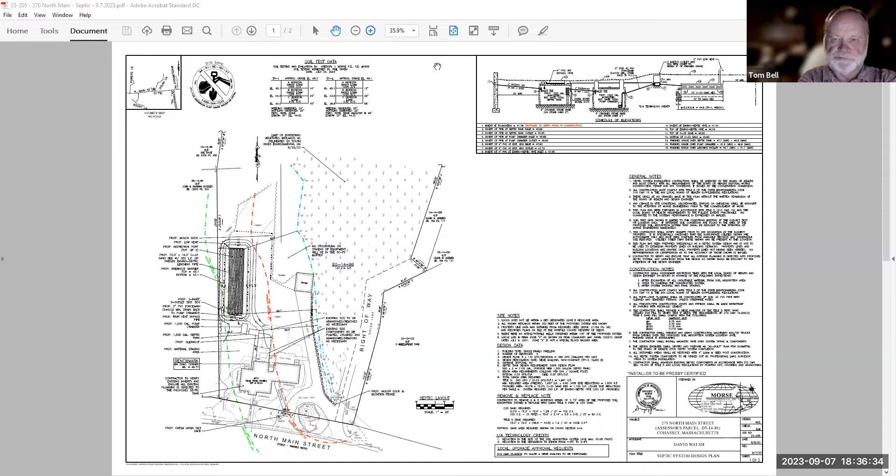So yeah, again, everyone, for the record, James Garfield with Morse Engineering, here representing David Walsh for the RDA associated with this septic system upgrade. Let's see here. Can everybody see this? Yes. Okay. All right, so to familiarize yourself with this plan, we've got our property lines shown here in bold, North Main Street shown down at the bottom of the page. This is an existing 5-bedroom single-family dwelling with a failing Title V septic system. The existing septic system partially resides within the 50-foot buffer to a bordering vegetated wetland.

And what we're proposing is to upgrade the septic system with a new 1,500-gallon septic tank, 1,500-gallon pump chamber, which will then pump the effluent up to a Presby EnviroSeptic leaching field. Just given the dimensional constraints at this site, it's impossible to keep the septic system outside of the 100-foot BVW setback. So we are keeping all septic components outside of the 50-foot setback. We are proposing a mulch sock down gradient of the proposed work. And we also, per Charlotte's request, are proposing a mulch sock with a silt fence along the existing driveway, which directly abuts the bordering vegetated wetland shown in blue.

It should be noted that Board of Health has approved this plan, and we believe this is a great improvement from what currently exists at this site. So with that, I'll pass it back to the commission for any questions. Commissioners, do you have anything to add to this? Questions? Is there any vegetation being removed for this system?

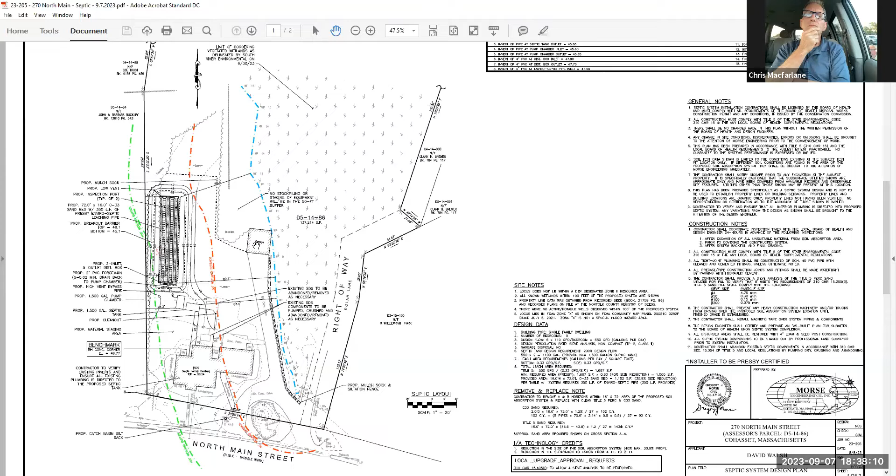I'm sorry, come again with that? Is there any vegetation or any trees being removed for this system? Yes, so one 4-inch caliper tree is being proposed to be removed, and then some brush, some underbrush as well. Mr. Garfield, can you use your pointer to show the tree that's being removed? Certainly. So it's shown here in red right there. Oh, okay. Thank you.

Where was the previous drain field or septic? So the existing septic system is shown here. Here's the existing septic tank, which then flows into this rectangular leaching field. So considerably smaller in size, and lower into the groundwater table as well. Can you show us the soil test? It looks like you've done 2 soil tests there. Yep. Can you show us the details of that, please? Yep, so right here, we've got groundwater down 20 inches in test pit 1 and 22 inches in test pit 2. So we're bringing the system up.

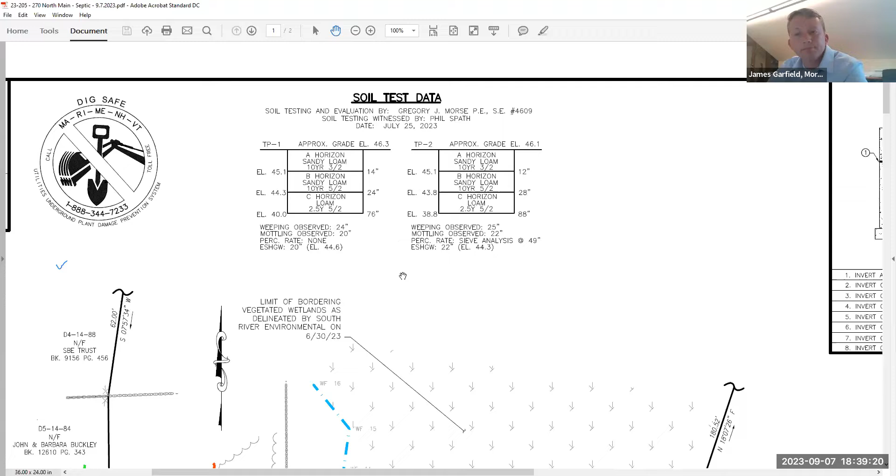How are you gonna access the site? So the site's going to be accessed through the existing paved driveway, which is why we've added this erosion control barrier along it. There's really not enough width to get machines through the left side of the house here. It's possible, but we'd have to take even more brush and landscaping out than we are currently proposing. Traffic's already going through this existing paved driveway, and it's maintained lawn to the left of that. So we're gonna be working on the upland side, obviously, of that driveway to access that leaching field.

So you go up the driveway until you have to cross over to access, so presumably there'll be some disturbance off the driveway in the 50-foot buffer zone. We are proposing no soil stockpiling or staging of equipment within the 50-foot buffer, and we have a note to that effect right here. But they will have to cross the lawn to get over to the construction area. Mhm.

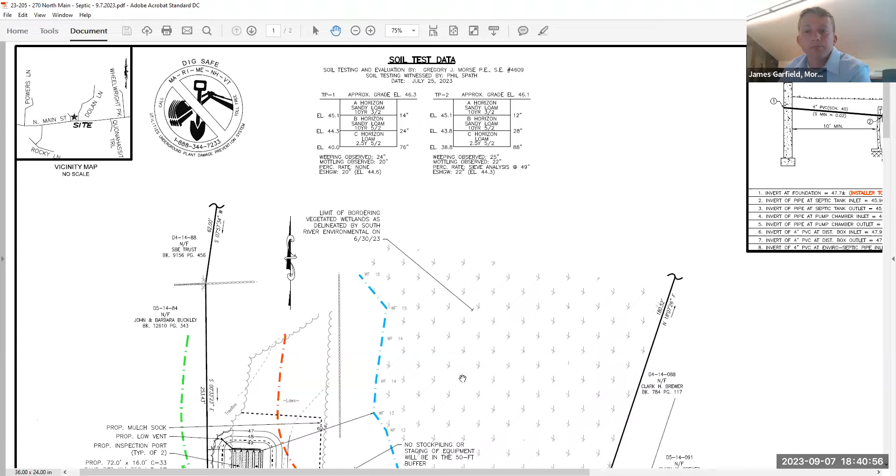Were you required to do a percolation test on this drain field or at that site? Yes, so we did a perc test as part of this filing with the Board of Health. So we did a sieve analysis in lieu of a perc test within test pit 2. Okay. Any other questions from the commission? No. Questions or concerns, comments?

Okay, with that, I would invite anybody who would like to make a motion to approve this. Actually, this is an RDA. So it would be a motion for either a -2 or -3, -3 if we have any conditions. Yeah, I have one other question.

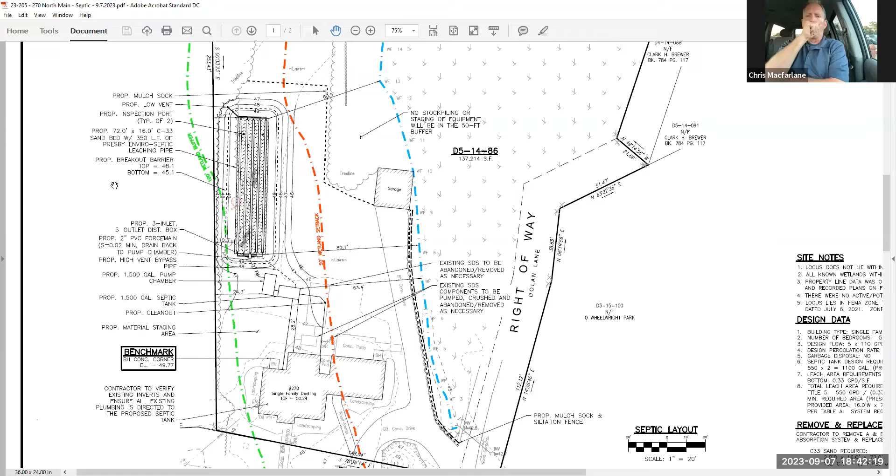Is there a stream here? Is this an intermittent stream here? Is this the one with the stream, Charlotte, or the intermittent stream potentially? Oh, sorry, Chris, was that to me or to James? I don't know, just a question. Is there an intermittent stream on this? Yes, there is one within the BVW system. It's not surveyed on the plan, but you can see the invert underneath that goes under Dolan Lane. But yeah, on the site plan, just the limit of the BVW is shown.

I can't say to that effect. I mean, even if there is an intermittent stream there, the buffer zone does come off of the BVW that it's associated with. And even if it was a perennial stream, septic upgrades are exempt from riverfront area requirements. Yeah, I'll just note that, although it's intermittent, for RDA site plans under section 4, we say that resource areas and buffer zones should be shown. So it doesn't say shall, but since it's an RDA, that's why it might have been more recommended. For NOIs, obviously, it would be required to show all resource areas and buffer zones, but for an RDA, we just say should.

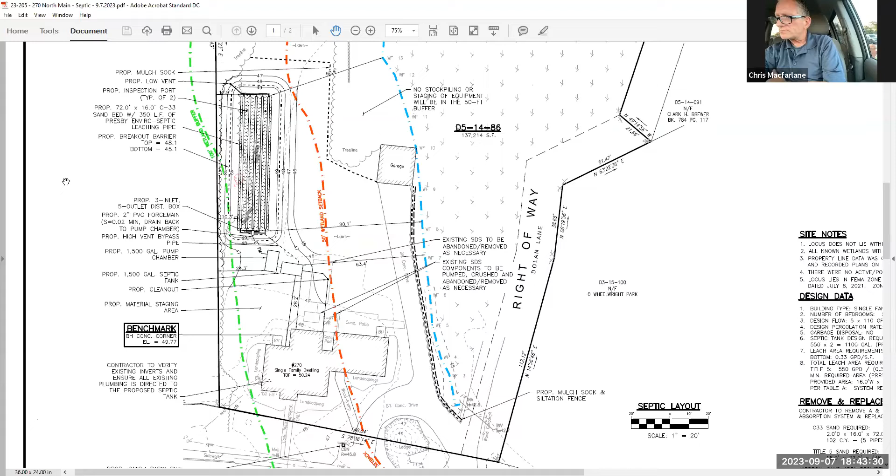So the flow is from Plan North to Plan South in that wetland, is that correct? Sorry, Tom, can you repeat the question? Yeah, the direction of surface water flow is from Plan North to Plan South, is that correct? Well, on the lot, it varies, I guess. The wetland is on the lot, yeah. On the lot, the house is the high point as shown by our topography. So it slopes in every direction away from the house. Oh, okay, that's not quite what I was trying to get at.

What I was asking was, if we were to infer where the location of that intermittent stream was, I think my recollection of the topography here is that it would flow from Plan North to Plan South within the boundary of the wetland. Is that accurate? That looks correct, yes. So it looks like it necks down to a pretty narrow wetland there, and then crosses the right of way or goes under it.

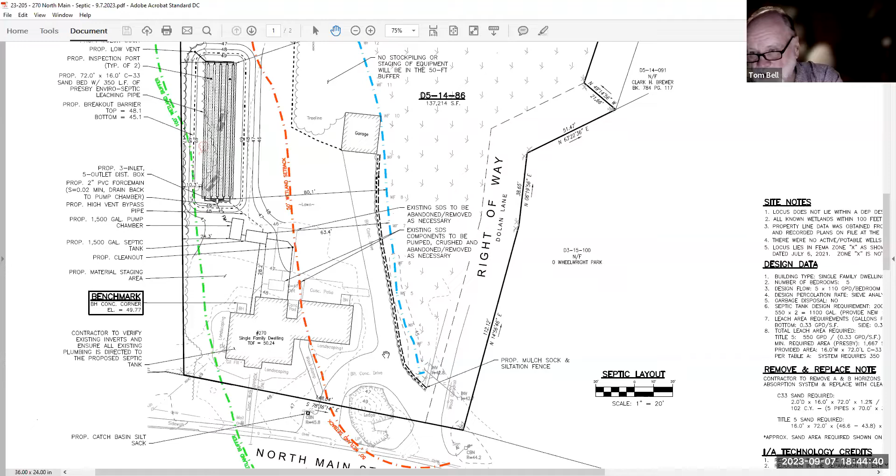Is that right? We have shots there. I'm guessing it's a culvert underneath Dolan Lane there. But yes, the invert elevations show that it's going from north to south. Okay. What condition is that culvert in? Do you have any idea? That I can't say. I'm sorry.

So commissioners, would you like to add any conditions other than those in our so-called boilerplate conditions here? You see any issues that need to be addressed as conditions? We don't have our boilerplate for the RDAs. Okay, yeah, sorry, we just have that boilerplate for orders of condition. But again, if you wanted to issue a -3 determination, you can add conditions.

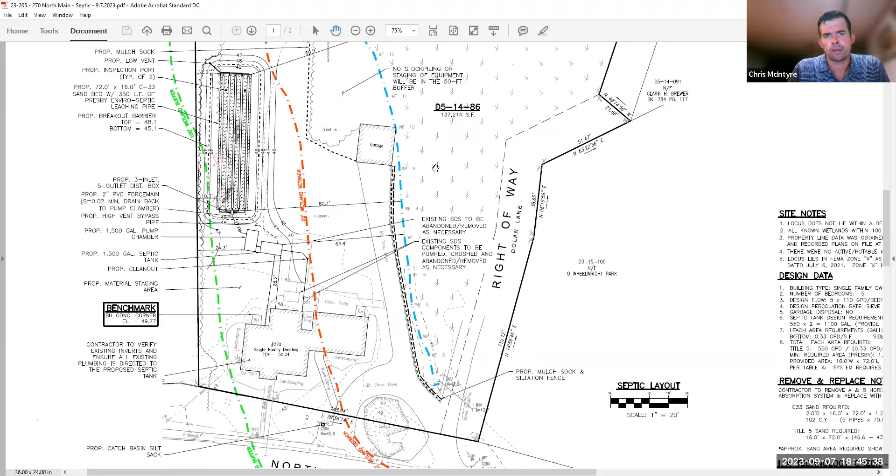Would your client be willing to replace the tree that they're removing? Yes, if that's a condition of approval, we can certainly make that happen. The one condition I would recommend for this is, I assume this work's going to take place fairly soon, so I think there'd be a condition that this fall the lawn should be completely reseeded, and then again if necessary in the spring, so that we don't get a lot of residual erosion over time through the 50-foot buffer.

Not only that, but the gradient on the wetland side, the east side of the mound, is pretty steep. So that obviously needs to be stabilized as well. So Chris, it sounds like you do have some conditions here, both Chris's. Yeah, so I'll make a motion to issue a -3 determination. Let's tally up our conditions first. Oh, okay. And then proceed to a motion. Okay. So why don't you go first, Chris McIntyre?

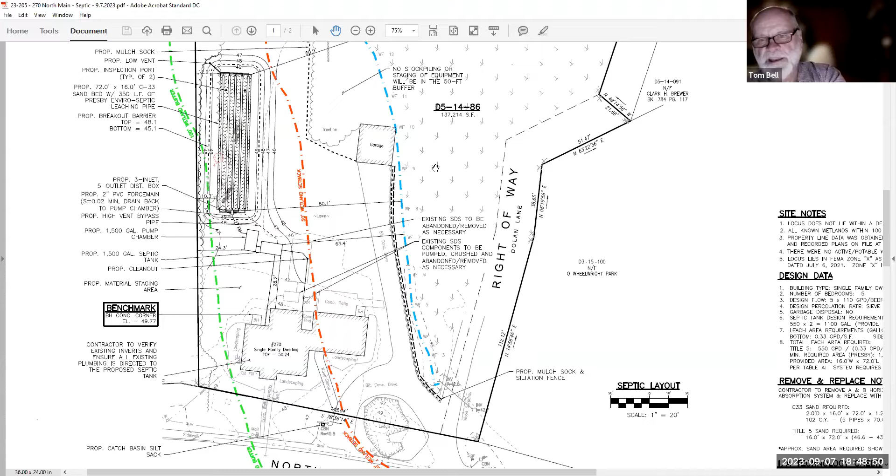Yeah, I think replacement of the tree with a species from our native tree list, in the 100-foot buffer, and then one of the standard conditions, or I guess it's not a standard condition, it's just in our regs, to go along with the 50-foot buffer: just a reminder not to use fertilizers, herbicides, pesticides. Right. I would add that we don't want to see a tree replaced in proximity to that drain field, because that tree is going to find that drain field and run roots all the way through it, depending on the species. So it should be somewhat removed from the drain field.

I had a quick question, going back to the gradient thing, is that a 3-foot differential around the field? Is that typical? Because that does seem pretty steep. I wonder if that should be graded more evenly if it's going to survive the years. Yeah, so that's a 3-to-1 grading around the septic there, which is very typical for a septic system. It will be loamed and seeded, stabilized post-construction. And this is purely an effort, in regards to the Board of Health side of this, to pull that septic system higher out of the ground, to provide adequate groundwater separation so that we can treat the effluent prior to it getting into the groundwater and eventually the wetlands. So we're trying to minimize the impact essentially.

Got it. I was just curious if 3-to-1 is a good ratio. It just seems pretty steep for long-term erosion. Yeah, it should be plenty. We do septic systems with 3-to-1 grading all the time, so it's very typical.

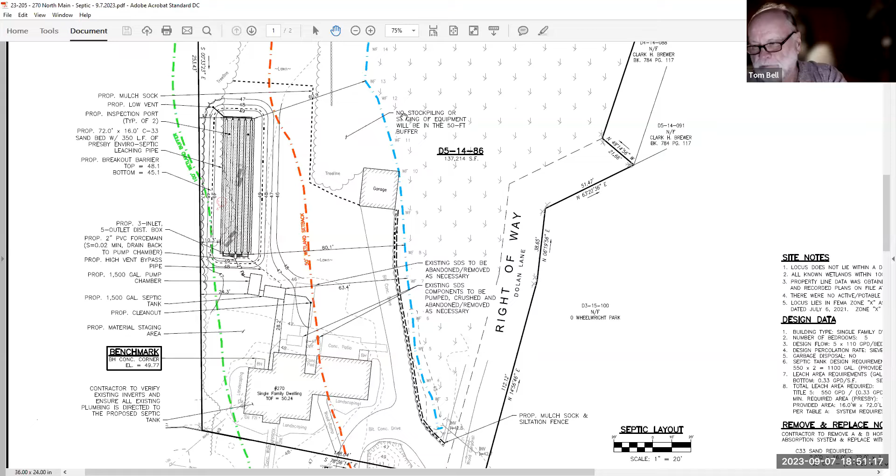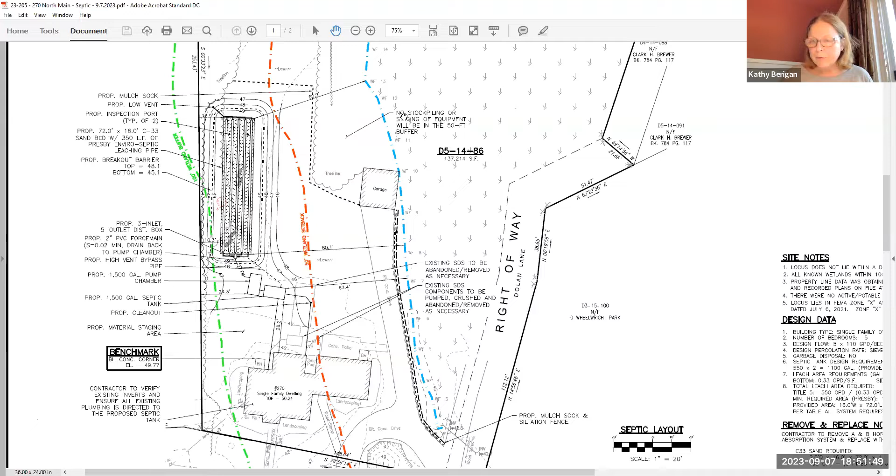Chris McIntyre, does that sound reasonable? Yes, it does. Okay. Any further conditions, commissioners? No, but I just have one question, please. Sure. About the loam that you're going to put there, am I correct in understanding that it's only going to cover about 18 square feet, which is the top part of the septic system, and only about 6 inches of loam on top of that? That's the only fill that you're bringing in on the existing lawn?

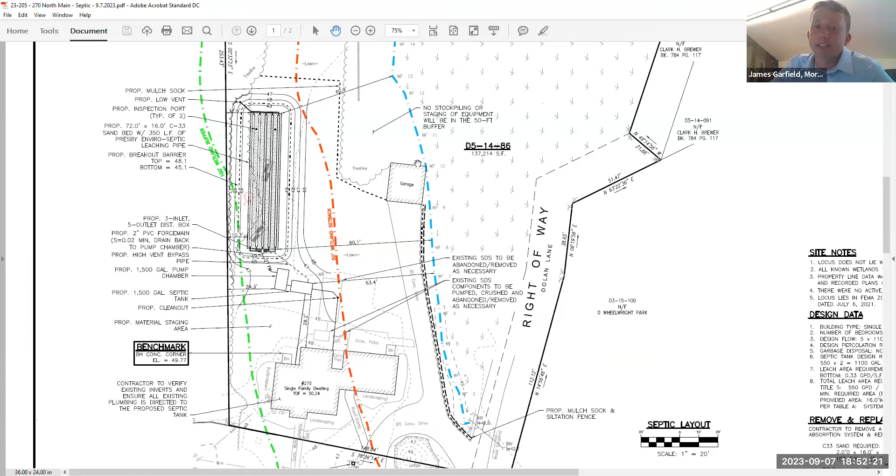So yeah, we're bringing in, I want to say bare minimum, I believe it's 6 inches of cover. Yeah, you're correct. 6 inches of cover being loam and seed on top of the septic system. We're raising the entire field. So the entire square footage of that area we are filling up. So does that answer your question? Yeah, so that's the only fill that's... Correct, just for the septic system. Yep, just to bring it up. Okay, thank you.

So from the minutes, can we construct the conditions that we're proposing? Charlotte? So do you want me to summarize and then? Well, I guess what I'm asking is, when we make the motion, do we need to recite all of these, or can we just reference the minutes? I would, just for clarity, say make a motion to close the public hearing and issue a -3 determination with the following conditions, and then you can just list them. Not sure if everyone wrote them down, but I can say it again before you make the motion. I know it's repetitive, but it's just for the minutes. Sure. So would you recite them, please?

Yeah, so one of the conditions would be to replace the tree being removed with a native tree from our approved planting lists and to not place it in proximity of the septic system. 2, that the lawn should be completely reseeded immediately following the completion of the septic work and within 30 days of completion, and shall be reseeded as necessary in the spring and reevaluated. And then the 3rd condition being our standard regulations on no fertilizers, herbicides, pesticides, insecticides to be used in the 100-foot buffer or resource areas. And then 4th, the erosion control barriers shall remain in place past germination until the lawn is fully established with no exposed soils.

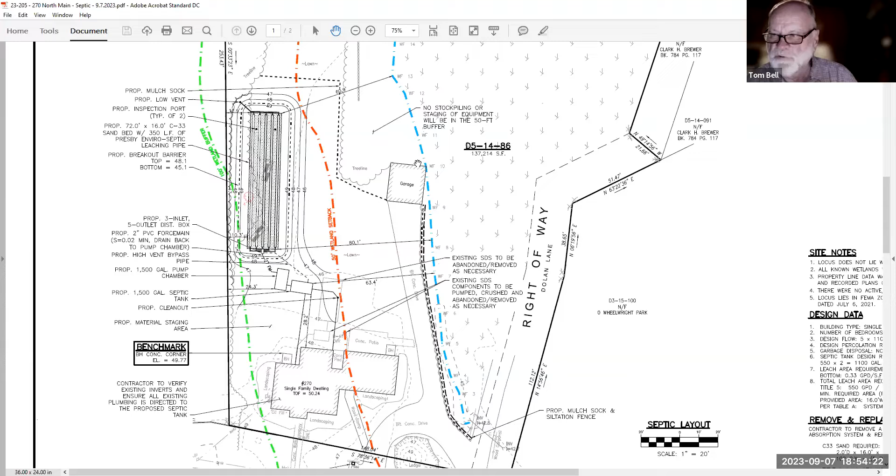Sorry. So I would assume that we can add our standard conditions when we issue a variance for temporary work in the 50. You can specify for the variance request, like what you want the variance to be composed of. Okay, so we're ready to go with your motion, Chris.

Make a motion to close the public hearing and issue a -3 determination with the conditions that no herbicides, pesticides, fertilizers, nitrogen fertilizer used within the area; between the work and the wetland would be regraded and replanted within 30 days of completion of the job and reseeded in the spring.

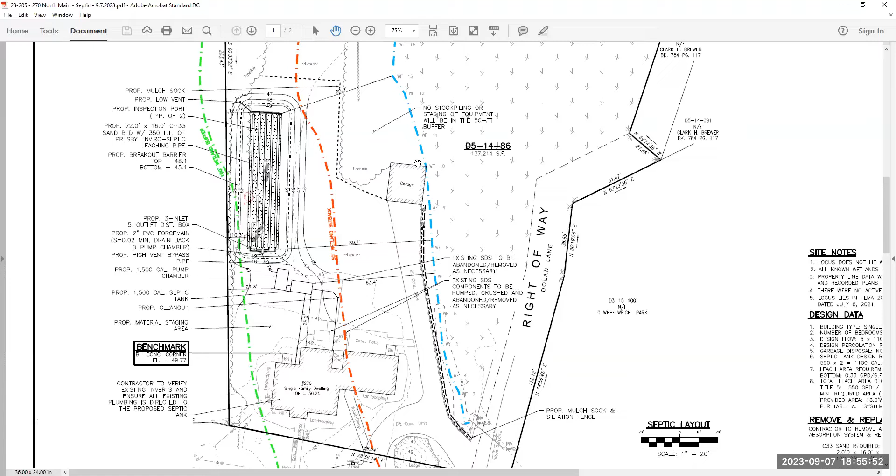That a replacement tree of 2.5-inch caliper be planted away from the construction of the new septic system, but within the 100-foot buffer, and that tree shall be picked from the list of acceptable plants, and that the silt sock will remain intact until the new lawn is established. Excellent. Do we have a second for that? Second. With a second, we'll go to a roll call vote.

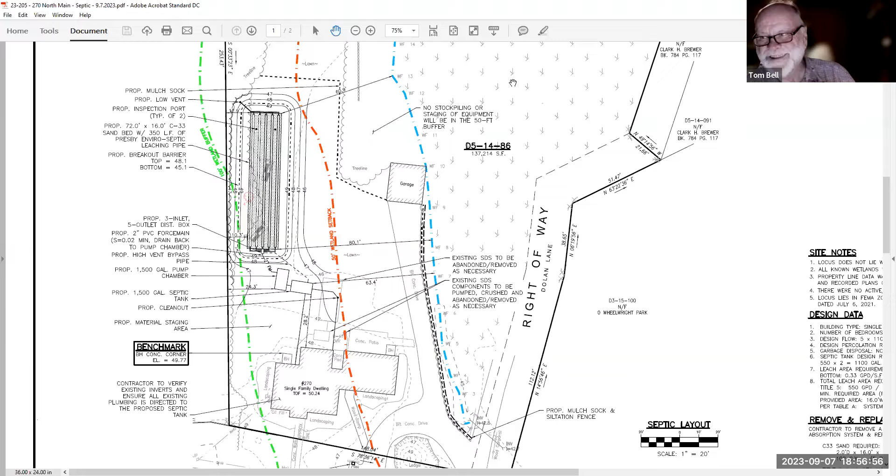Kathy Berrigan, aye. Chris McIntyre, aye. Chris McFarland? Chris, you're up to vote. He's coming and going. Charlotte, in that we have a quorum, if I vote, it's still good, right? Or should we wait for Chris? Oh, you mean like a majority? Yeah, okay. Tom Bell, aye. So that vote passes unless, Chris, looks like you're back with us. I'm back. Sorry about that. No problem. Yay is my vote. Okay. So this motion passes 4-0-0.

And so the next step is to issue a variance for work within the 50-foot buffer, with our normal conditions for that, right, Charlotte? No mechanized. So sorry, do you want to make a motion to issue a variance? Yeah, I'll make the motion to issue a variance for work within the 50. There's enough earth moving here to be done that it would be pretty rough going to do it with shovels and wheelbarrows. So what we can say is that we would set a condition that the excavation equipment be of minimal size. And by that, I mean perhaps one of these excavators that you ride behind instead of a full-size backhoe or something like that.

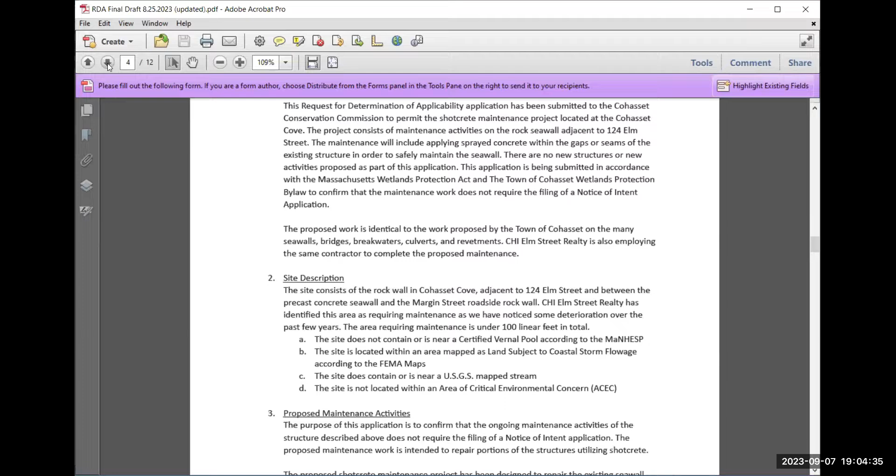And John can step in and handle whatever you guys need. But we're here tonight for an RDA for a portion of a seawall on 124 Elm Street. This is actually just sort of, I would say, routine maintenance using the same means and methods for the other seawalls throughout Cohasset Harbor. We'd actually be working with the exact same contractor that the town has been working with for the seawall repairs. That's Shotcrete. Mike Whitehead would be doing this work as well.

And so, again, looking for the exact same conditions and the same process that the town has already approved and has been working with for the other seawalls throughout town. And this is for the northern portion of the seawall. Again, the southern portion is revetment, which are the large sort of granite blocks. We're not looking to do anything to that. The portion is the dry set area that Charlotte just had pulled up on the screen.

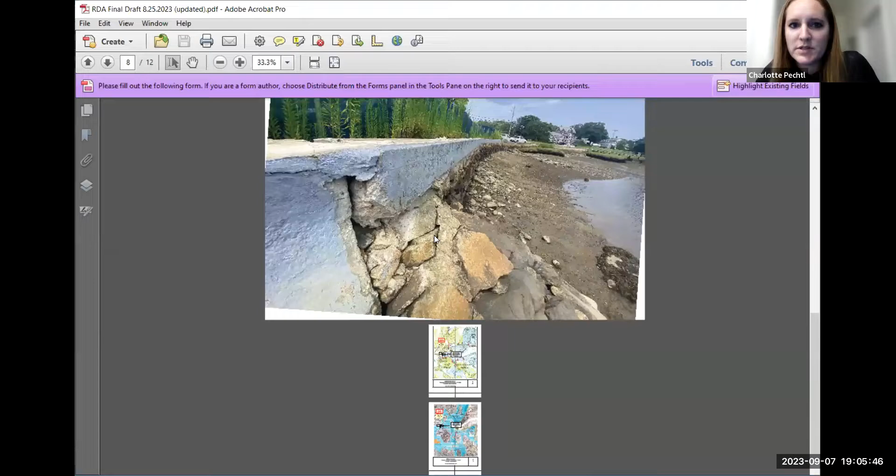Charlotte, would you go back to the pictures that you were just showing? Yeah, and Ted, if I may, the site plan that was submitted with the RDA is, oops, sorry, I don't know why I'm trying to zoom out here. It was a markup of the previous RDA plans that were submitted from the town. It was RDA 2108, I believe. And so those 10 locations were from the previously approved town project. And then the spot 11 that Ted and John had labeled on the plan is this area that you see here that they're proposing to repair.

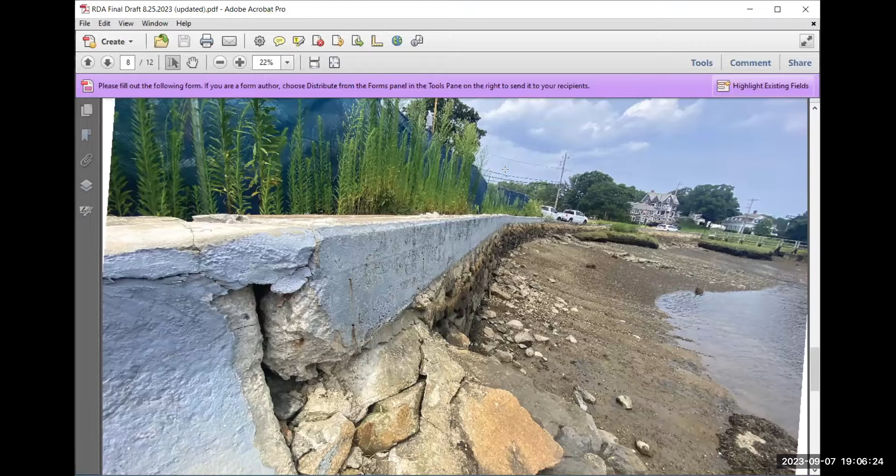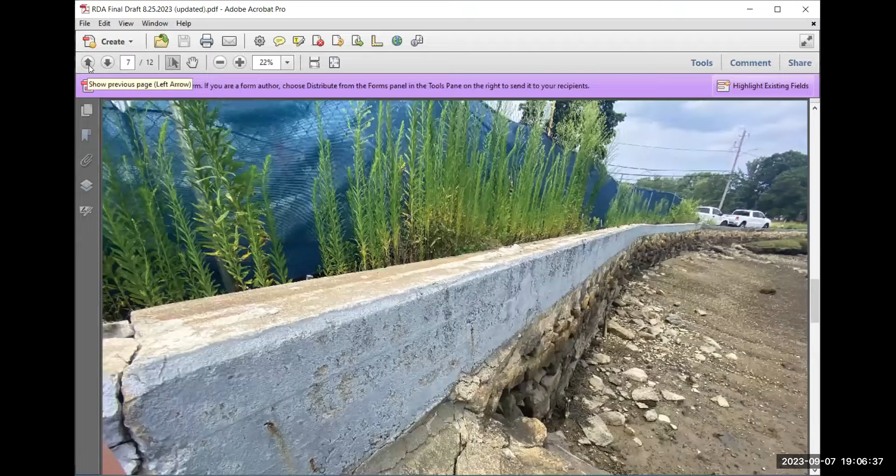Yeah, and we did that to show the proximity to the other work that's been approved. Right. And so, Mr. Chair, it's the portion just to, like, essentially where the long weeds start at the middle of the screen, extending down to where the white truck is. Mr. Lubitz, you're not an engineer, is that right? I am not, no. I've always been curious about these. I know the town's put a lot of them in, put a lot of shotcrete in here.

It's my understanding that these dry walls allowed passage of seawater with the tide as it went in and out. And so they naturally drain. And I have the same concern. Actually, my property that I live on has a dry set seawall. And I've had the same thoughts that you have as the town was doing this. And I did consult with a structural engineer. And I also have talked to Mike Whitehead, again, the owner of Extreme Shotcrete.

And what they do is they actually put in the drainage tubes so water can come and go. So it has weep holes, essentially. Exactly, it's got weep holes, and that's the same process that we did actually when we repaired or replaced the pier at the salt house. One of the issues that I've been told about with the dry set is actually things leach through it over time, so you end up losing a lot of backfill. But with the weep holes, it's a lot more controlled, and so that actually allows it to drain and get the water out behind it in a controlled way.

Great. So I mean, if it were fully sealed at low tide, you'd have hydrostatic pressure on the landward side of your wall, and you could end up with bulges like we saw over by the salt house. And I'm not saying that those were caused by freshwater hydrostatic pressure, but you know, if you seal this thing completely at low tide, I mean, these walls aren't really designed to hold the water back.

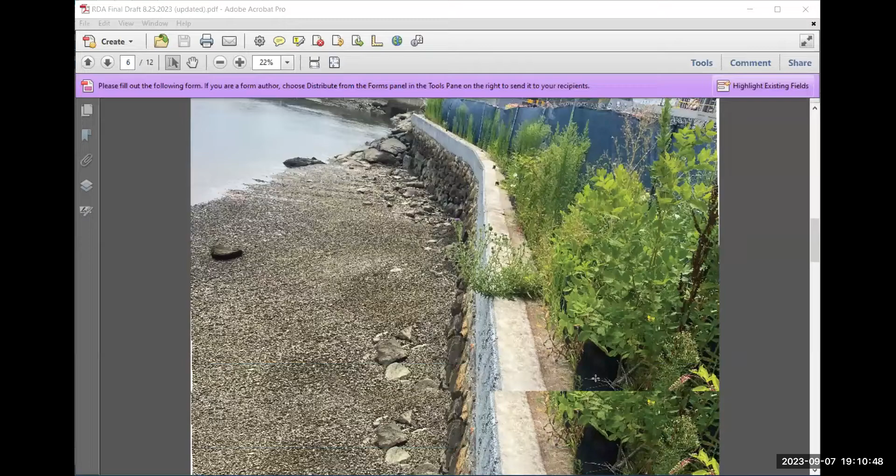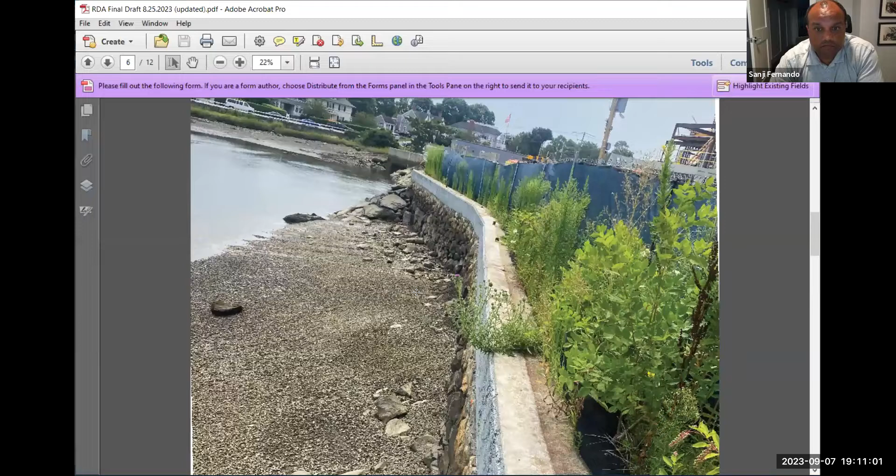Yeah, it's actually interesting. We don't have any breaches on our site, any of the property or our seawalls. That is at the low point, and there's actually a drainage tube there, a storm drain that water ebbs and flows out of, and then it breaches over the street side on Margin Street. But it does not breach over this seawall. This seawall historically has plenty of clearance, as does our other one as you extend south down the site. Got it. It actually meets the finished grade, where there will ultimately be a boardwalk right next to this as part of the redevelopment, and it was all designed to be matched up like that.

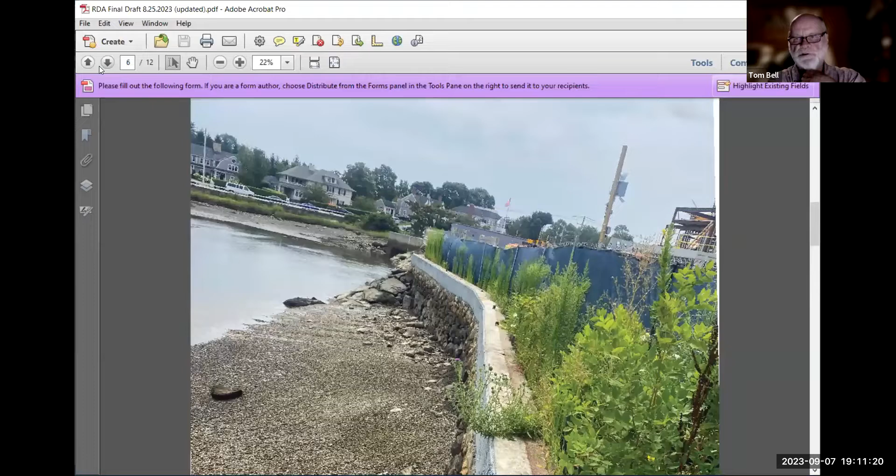You want to back this picture up again to, not there, to the other end. Charlotte, are you the one that's controlling this? Where's Ted? Yep, sorry. I'm interested in this crack we see in the very left-hand side here. It looks like after your pour, this wall has moved a little bit, more than a little bit.

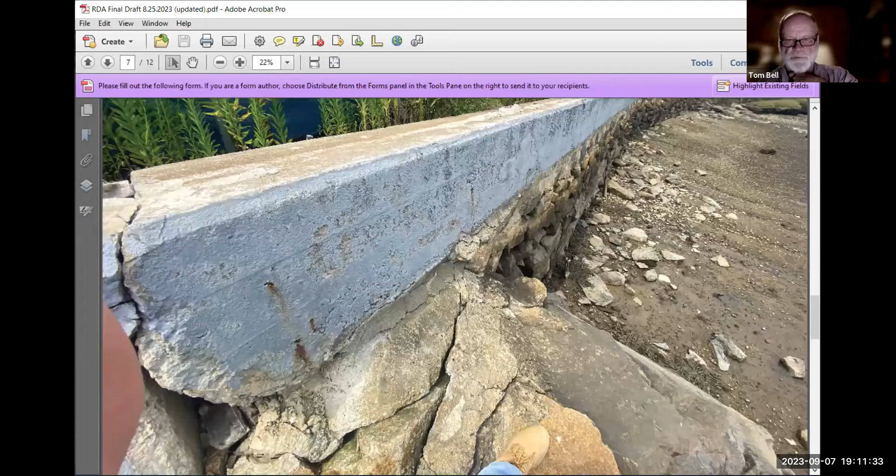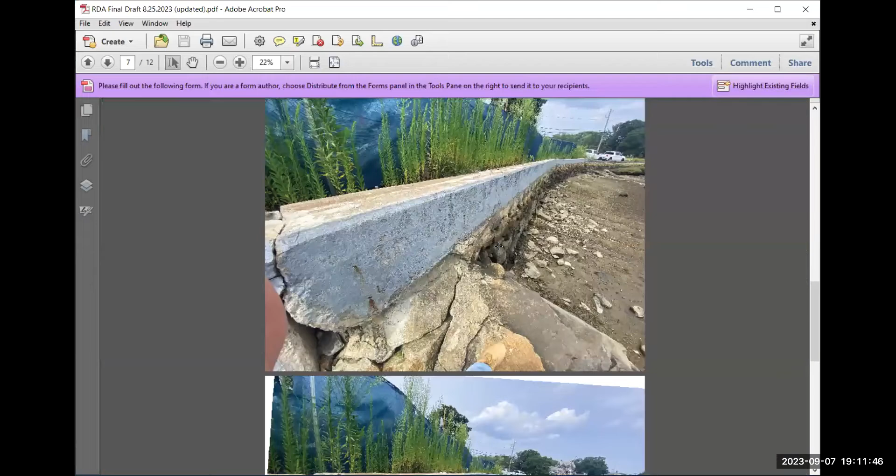Yeah, so these are separate pours, actually. There are two series of seawalls, and this is the end of the revetment, the beginning of the dry set area. So that's a poured concrete cap that was placed on that. You can see how it transitions from essentially Jersey barriers into a poured cap. I see. So that's going to get filled with shotcrete as well. Correct. That one section, just the joint. Okay.

And then just a quick question, whether it's tarp or plywood that you put down at low tide, I guess that will just come in and out every 6 hours for the hour that you have before the water comes in? Is that the way they do it? Yes, they do. And Mike believes he can do this in one low tide. If not, it would take two. But he intends to do this in one sitting. Everything would be removed as the tide comes in, and then put back down at the next low tide if it is 2 days.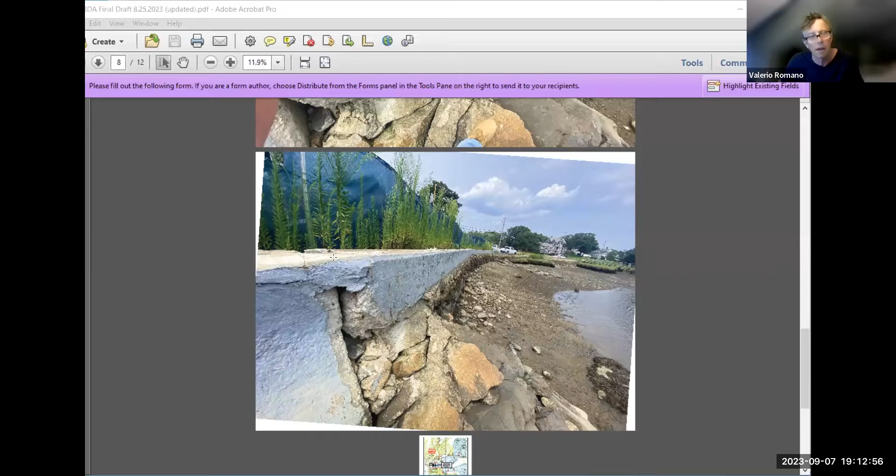And then I noticed from the application that you're also going to have to spall or chink across the wall to make it so that the shotcrete will stick. Is that right? The spalling is for that purpose, but the chinking is just any small chink stones that have fallen out over time will be put back in. Okay. Thank you. Further questions or comments?

I'll just note too that the town RDA had a few conditions. I don't have a scan of it right now, but I'm looking at the minutes. At least 7 days notice with specific timing of project and tides will be given to the agent prior to the start of works, basically a 7-day pre-construction notice. And the commission had asked for a pre-inspection between the town of Cohasset and the agent to discuss the exact location of shotcrete usage. So if you wanted to suggest those as similar conditions.

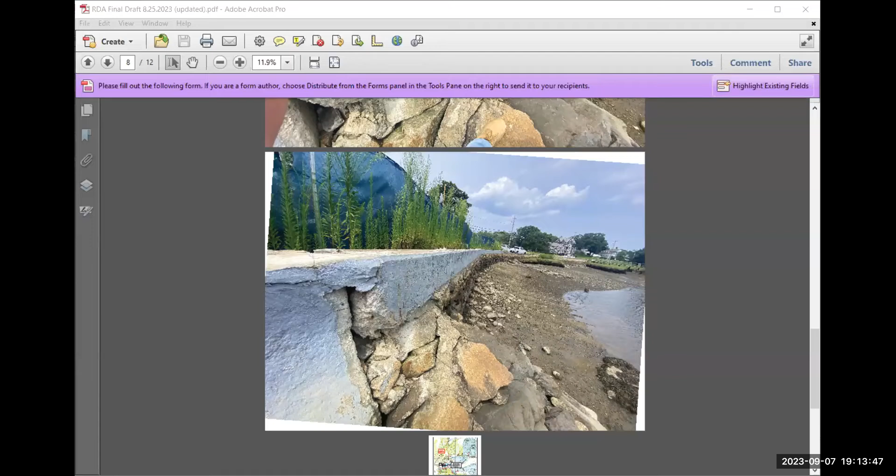I believe also in their application, Ted, you had provided a work schedule too. So I can pull that up. You could do either, it's up to you guys, but just wanted to note that. I believe you had it in your narrative. Yeah, and we're happy with whatever you guys are comfortable with. So this is what you were suggesting. Yep, at least 7 days notice, pre-inspection.

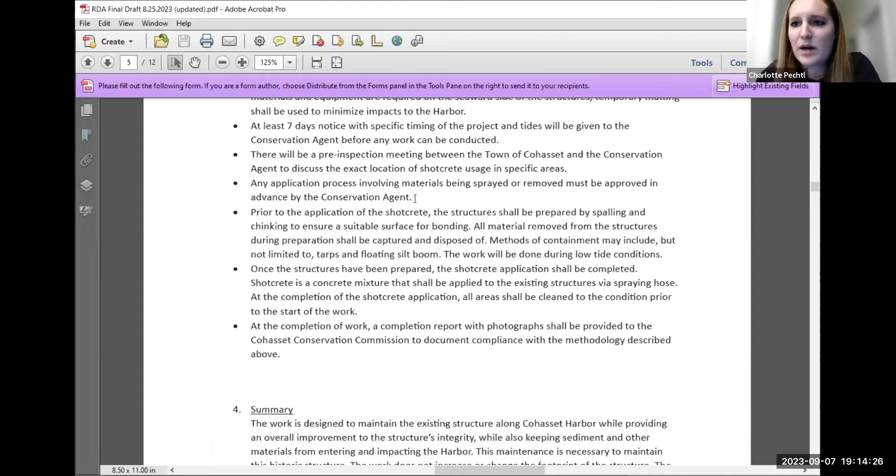Oh, thank you. You're using the same stuff. And then the application process must be approved. I had looked at that process before the town work started, but I'm happy to do it again. So basically, this is their proposed methodology. It's pretty much exactly the same as the town RDA that we approved 2 years ago.

So we'd be talking about a -3 determination. Is that correct, Charlotte? Yes, if you want it with conditions. The only condition I recall was made by Chris McFarland that there be tarps or plywood placed on the beach during shotcrete operations and picked up before the tide comes in. Yep. Were there any other conditions?

Well, Tom, these were the conditions from the town project. Right. So as long as these carry through, then that would be the only conditions. Okay. Do we know whether there were any other conditions that we issued? I don't recall the hearing in enough detail for the other side of the harbor, whether there were any other conditions that we should also include in this one.

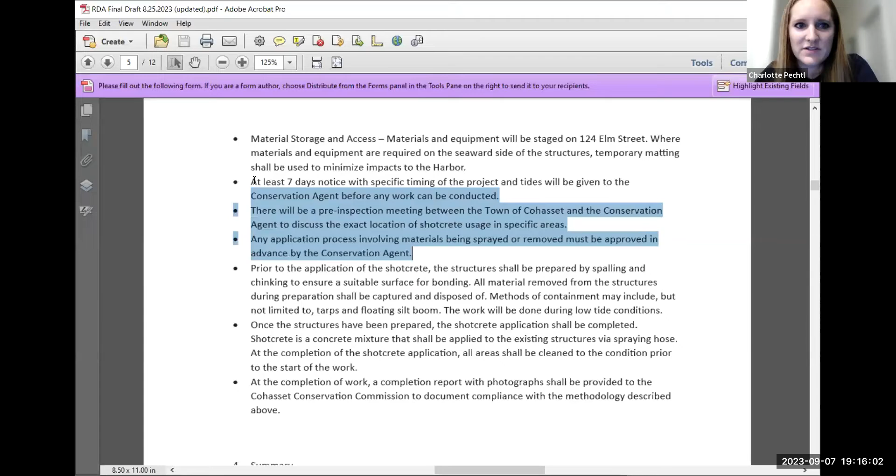This was another one of the conditions, that the application process involving materials being sprayed or removed had to be approved by me beforehand. So that was actually one of the first things I did when I started. But this was another condition. So these were the three in addition to what Chris just said. Okay, so let's include those three in our -3 determination. Mm-hmm. And then they've also suggested these as part of their methodology as well.

The applicant suggested these? Yeah, this is in the RDA narrative. Okay. So let's incorporate those into our conditions then. Yeah, you could make a statement that all steps as narrated in the RDA shall be followed, and then in addition Chris's suggested condition about the tarps and plywood being in place. Okay. Is anybody ready to make a motion here to that effect?

If not, I'll make a motion to close the public hearing, to issue a -3 determination with the added condition that all the conditions being what were in place for the town, plus the idea of using a bigger tarp in lieu of plywood to catch the rebound coming off the shotcrete. Okay, so maybe more concise would be to use tarps that sufficiently cover the intertidal zone at low tide to prevent spillover or splatter from shotcrete. Sounds good.

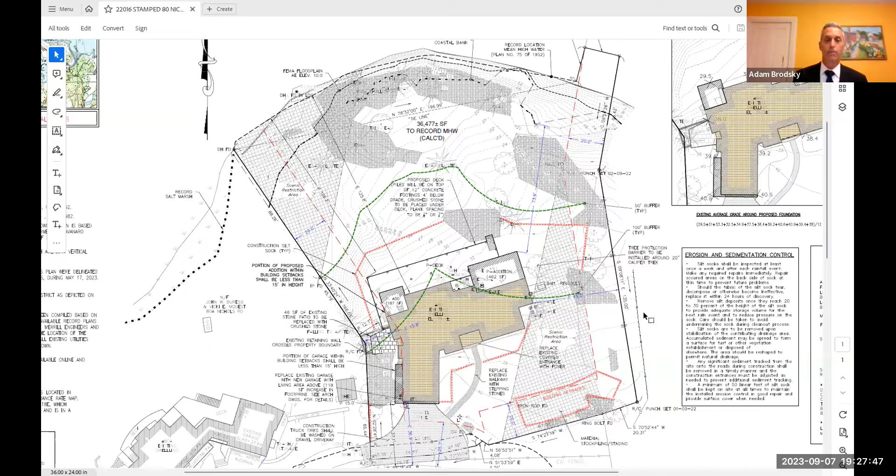And just in summary, the project is designed to ensure that there'll be no adverse impact to any of the wetland resource areas. And again, all of the work is located outside of the 50-foot buffer zone, which is regulated more stringently by your local bylaw. So with that, I'll turn it over to Carmen, and thank you for your patience.

Thank you, Adam. I don't really think I have that much more detail other than mentioning the silt sock. So here in red, we have the silt sock that is going to be installed during construction downstream of the proposed work. This also is showing some silt sock on the other side, just to keep any kind of siltation from going close to the home, and the material and stockpiling area is going to be over here towards the front of the property.

So you did a tremendous job, Adam, going through all of the resource areas. I don't think I have anything to add. So if anybody has any questions. Commissioners?

I'll just note too, Carmen and Adam, thank you for that amazing summary. One of the commissioners' comments last time for the RDA review was to install some necessary protection for the tree that's closest to the easterly addition in the rear. So they have added a note that, I'm sorry, I can't read it, but it does say tree protection barrier to be installed around 20-inch caliper tree. Yeah, we were thinking about a construction fence around it. Further comments or questions?

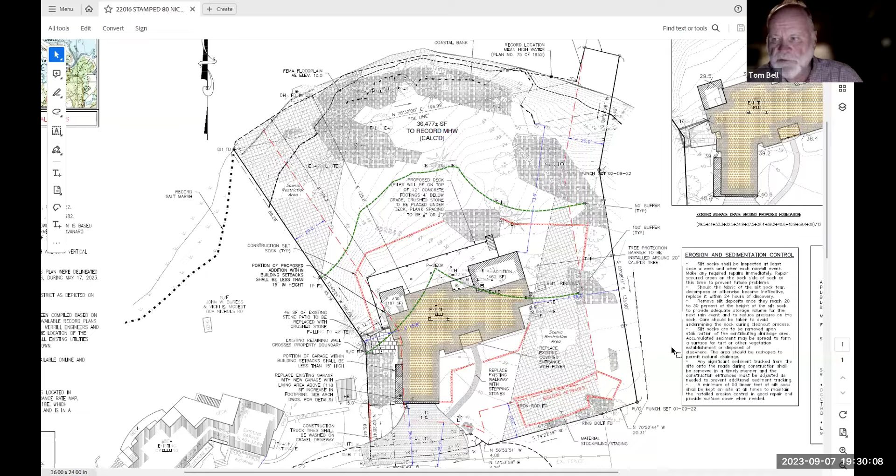So with that, does anyone care to offer a motion to approve this notice of intent? I'll do it. I move that we approve the NOI 2325 with our standard conditions, and the condition that a tree protection barrier protect this, what's the caliper of this tree? 20 inches, a 20-inch caliper tree just east of the addition of the deck. I don't believe there were any other conditions. Is that correct? Okay. Second.

I'm going to go to a roll call vote. Kathy Berigan, aye. Chris McIntyre, aye. Chris McFarland, aye. Tom Bell, aye. This motion passes 4-0-0.

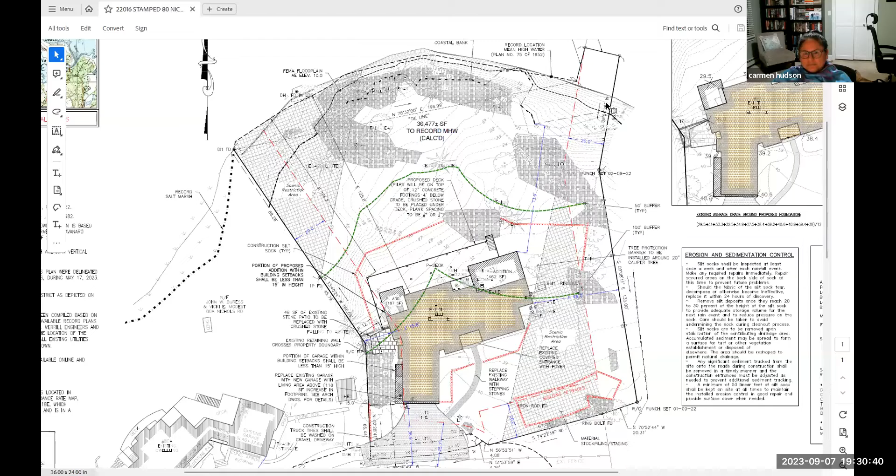Okay, so they heard it once. She was right, even though it was a pain in the ass. She just popped me again. Yeah, because it would have been a bunch. Let's mute them real quick. Don't want to have those open mics, do we? Yep, no, we want to mute that. Okay, next hearing. Good, yeah.

So next up is notice of public hearing for NOI 2324 and stormwater permit 2317 at 15 Windy Hill Road, Cohasset. In accordance with Massachusetts General Laws, Chapter 131, Section 40, the Cohasset Wetlands Bylaw and the Cohasset Stormwater Bylaw, the Cohasset Conservation Commission will hold a public meeting on Thursday, September 7th, 2023 at 6:30 p.m. via remote participation on Zoom platform for NOI 2324 and stormwater permit 2317 for construction of an addition and upgrades by applicants Andrew and Catherine Knowlton.

Charlotte, would you introduce our applicants? Yes, so we have Andrew and Catherine Knowlton, applicants and property owners. Caroline Reese is also in the audience, but I think you're going to take the lead on this one. So we have Brendan Sullivan from Merrill Engineers and Land Surveyors, and Caroline Reese as well for backup questions.

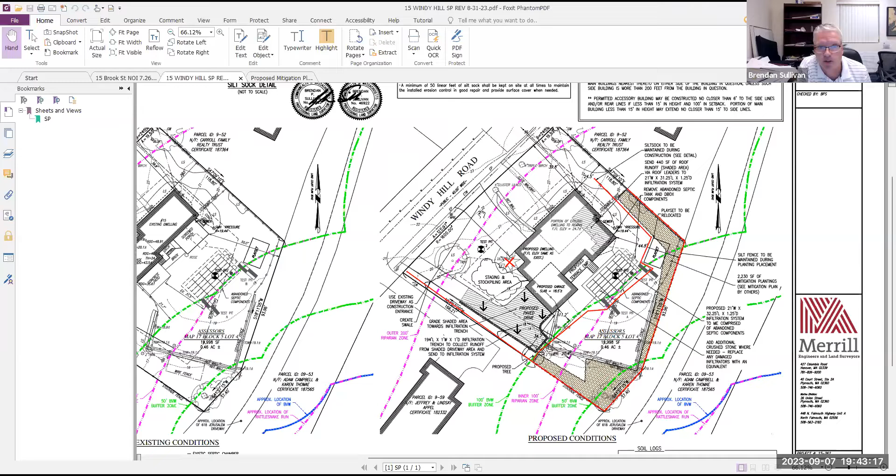In the same vein, where will your construction entrance be? The old driveway? Yeah, we have a note here to use the existing driveway as the construction entrance. Okay. So, do you have the planting plan for mitigation? Yes, we do. Can we look at that?

So here it is. This is the plan that Brad Holmes put together, which shows the area to be planted and the plant legend species over here. Your typical sweet fern, bayberry, beach plum, mountain laurel, witch hazel, eastern red cedar, black birch, butterfly weed. And can you tell me why at the bottom of the page there's a triangle that isn't planted? Is that because you reached the limit that you needed to?

That whole area right now is two giant, like 8x8 bed vegetable gardens that we put in during COVID. It's been very fruitful given the area. But we're going to remove that to do these plantings, and a much smaller little garden. So like a raised garden? No, we won't have anything that obstructs anything.

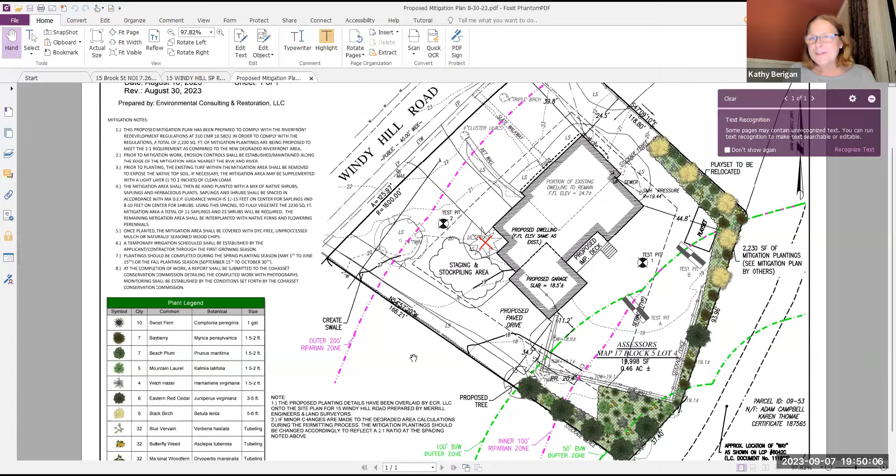Kathy, you okay with not seeing another test pit necessarily? Yes, I defer to you. You're the expert in that field. Well, I wouldn't call myself an expert, but I do know a little bit about it. I know you do. Yes, that's fine. Okay, so back to what I was saying.

I make a motion to issue an order of conditions with our standard boilerplate conditions. Do we have a second for that? Berigan, second. We'll have a roll call vote. Kathy Berigan, aye. Chris McIntyre, aye. Chris McFarland, aye. Tom Bell, aye. That passes 4-0-0.

So stormwater permit, do we have any concerns about this? Did you want to do the variance first for the NOI, or do you want to do that last? Yeah, no, sure, let's do that. So I move that we issue a variance for work in the 50, I guess, for this replanting, correct?

Yeah, we also, I mean, Brendan and I are kind of looking at this in 2 different ways, but for the most part, we could have an alteration of greater than 1,000 square feet, but it is already previously degraded. They're meeting the redevelopment standards.

Right. And there is some contradictory language in our regulations, so I had requested that they ask for a variance for the 50-foot buffer work and greater than 1,000 square feet of alteration, but there's definitely some language that I'm happy to go over with you guys that is a little contradictory, so it's whether or not you guys agree that the variance is for just the 50-foot buffer or if it's over 1,000 square feet.

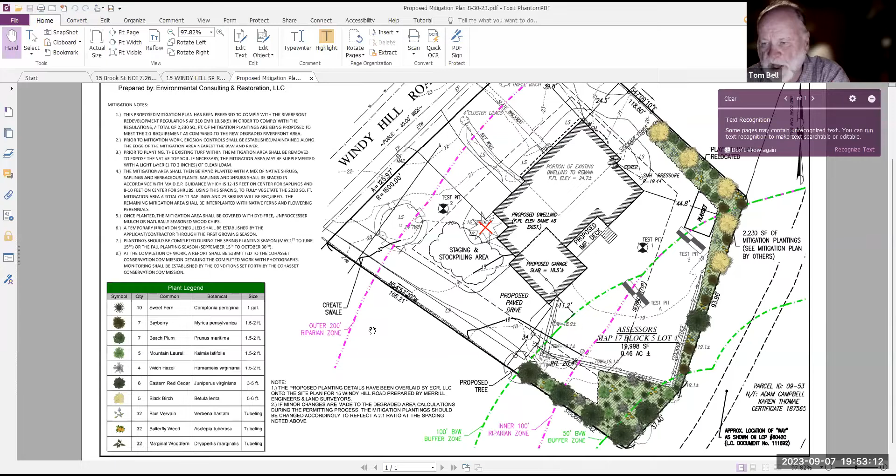Okay, so do we have a second for this variance? Oh, do we make a motion or? Yeah, I did. Okay. I'll repeat it though. I move that we issue a variance for work within the 50-foot buffer. Second. Roll call vote. Kathy Berigan, aye. Chris McIntyre, aye. Chris McFarland, aye. Tom Bell, aye. That motion passes 4-0-0.

Okay, so let's move on to the stormwater permit. Were there any further questions about the stormwater permit? We sort of talked about all of this without distinguishing which questions we were asking pertain to which permit. So this is kind of your last chance to comment or a question about the stormwater system. Okay, with that, then I'll make a motion that we approve the stormwater permit 19.9 with our standard conditions for that.

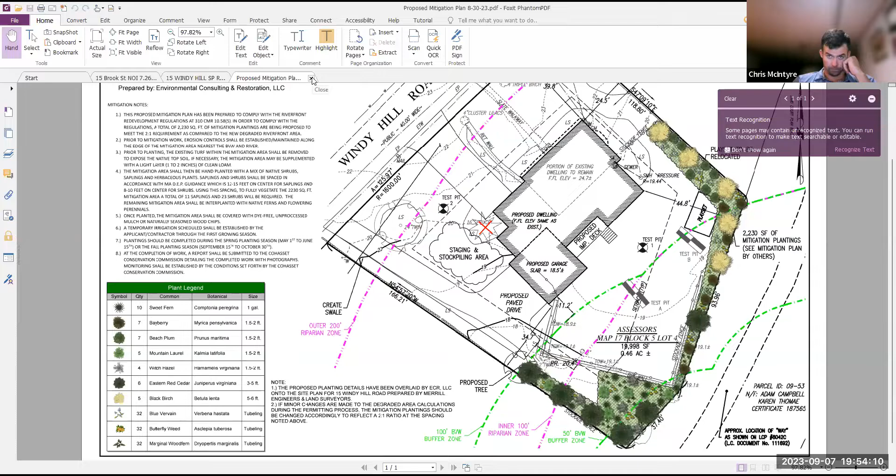Second. Roll call vote. Kathy Berigan, aye. Chris McIntyre, aye. Chris McFarland, aye. Tom Bell, aye. That passes 4-0-0. So do we need to issue another variance to cover the stormwater permit, Charlotte? No, because the variance is just under our wetlands. Yeah, so not under the stormwater. All right. But any work that's affiliated with stormwater in the 50-foot buffer, and I don't think there is, it technically would overlap over the order, but not for the planting. So no variance for stormwater.

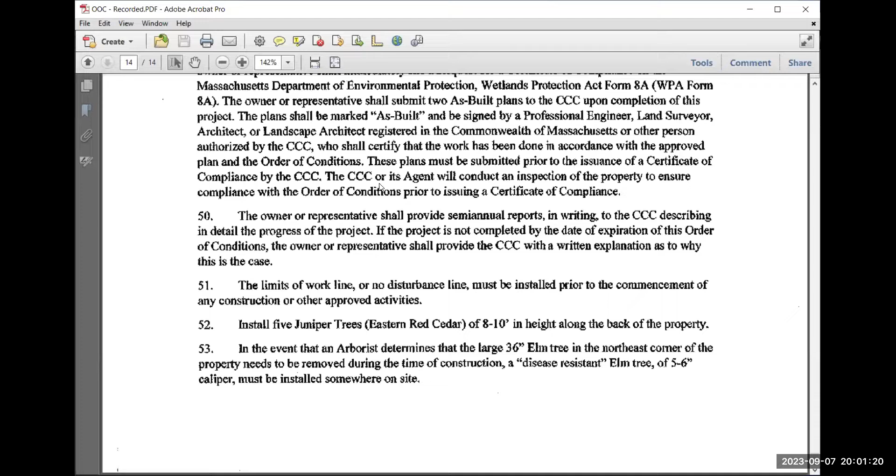Okay, so I move that we grant a 3-year extension to notice of intent 1909 with the approved conditions as of August of 2019. Do I have a second? Second. Roll call vote. Kathy Berigan, aye. Chris McIntyre, aye. Chris McFarland, aye. Tom Bell, aye. Motion passes 4-0-0.

Thank you very much. Welcome. Welcome.

So what are we moving on to here? How do we deal with this discussion of 22 Gammons Road? Do we need to read that? It's already read into the record, right? Yep. Let me just promote Don O'Neill, who's the applicant. This was continued, right?

So I can give a quick summary. So this was an order of conditions that we had recently issued with the last meeting. We wanted the work to start because of the concerns of the safety issues with the dead trees. But the commission had requested a special condition to review basically a distribution plan for the felled material.

And so Don has worked with Brad Holmes. He's at another meeting right now, so unfortunately I don't think he'll be able to call in, but I can pull up the plan. So they did develop a distribution plan for where to put all the fallen tree debris. So the order has been issued for this project. Let me just pull this up real quick, sorry. Don, did I leave anything else out?

No, just to recap where we left off, Brad, myself, and Andrew from the tree company met on site on logistically how to take the trees down first. And then in the designated area, how many trees we could get up and place into the triangle portion of the lot. And we came to the conclusion that 4 of the trees, 6 through 10, could fit up in that lot, cut in 8 to 10 foot sections and placed with some of the branches laying on top.

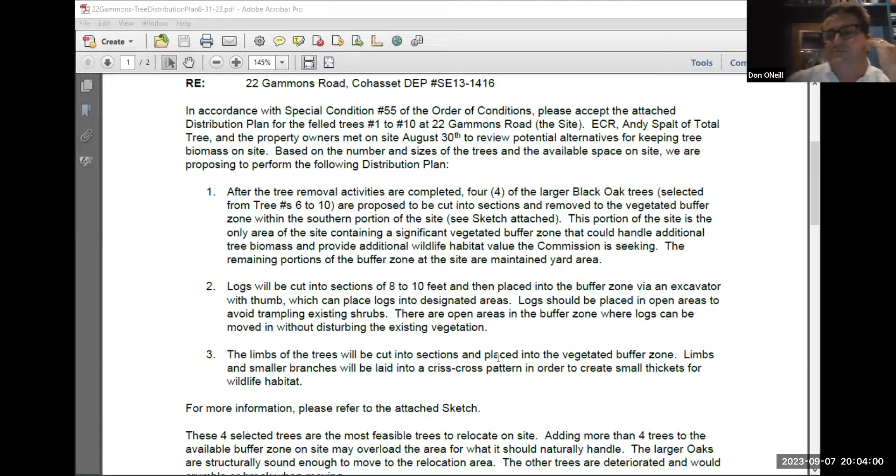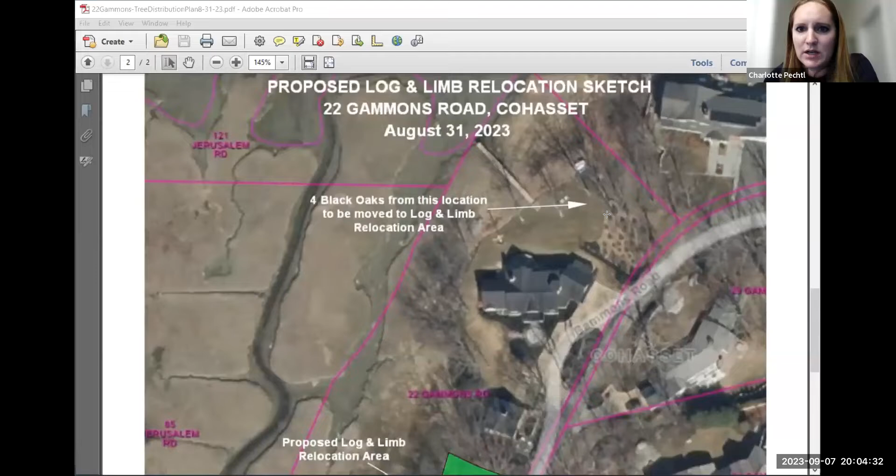Could we see this attached sketch, please? Yeah, sorry, I was just keeping the description up. So this is the plan that Don, ECR, and the tree companies have proposed. This area here is behind the boathouse, and so they're shading this area here for the proposed log and limb relocation, and then the 4 black oaks from this location will be moved to the log and limb area. So these trees here that were 6 through 10. The material will be cut up as specified on this memo and then placed here behind the boathouse.

Commissioners, comments? No comment. Go ahead. No, I was saying no comments.

Okay. Just as a reminder, we ordinarily require that all of this be left within that 50-foot buffer, but also recognize that this is an awful lot of timber to leave laying around on the lawn or the edge of it. And I think in this circumstance, this compromise makes sense. I believe actually Valerio was the one that suggested this, and correct me if I'm wrong, but I think this is a good compromise myself. Yeah, I have no objection. I appreciate the owner doing this. Thank you, Mr. O'Neill. Thank you.

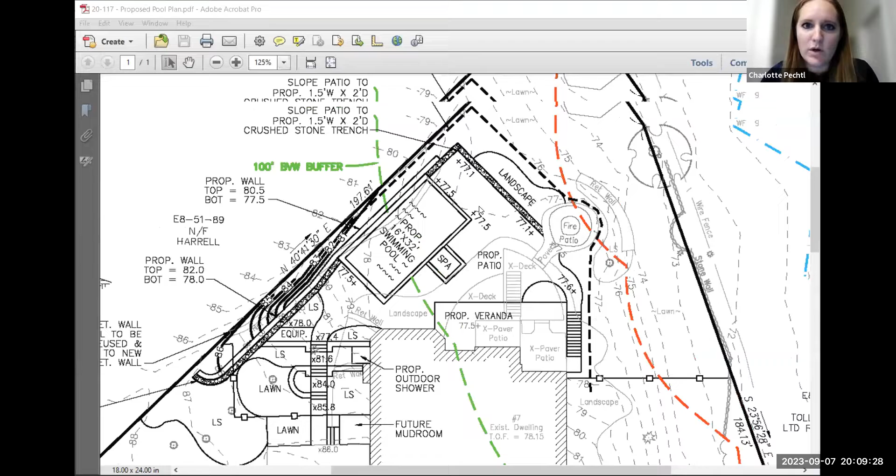There was the pool equipment, which was added. So I'll show you guys the as-built for reference. The pool equipment was installed in the 100-foot buffer, but I will say that this is something I almost always see for pool projects, for houses too, with generator pads. So the pool equipment was just installed here and it's connected accordingly. So the trench is still here. It's just a little smaller than proposed.

And the stone retaining wall was added around a northern landscape area. So it's kind of around this patio, partially in the 50, but I did confirm with the engineer, it's pretty de minimis. It won't have an impact on stormwater. The patio is just a little larger. It was an increase of about 22 square feet of impervious surface in the 100, but the engineers noted it's de minimis and won't have an adverse impact on the calculations of the buffer.

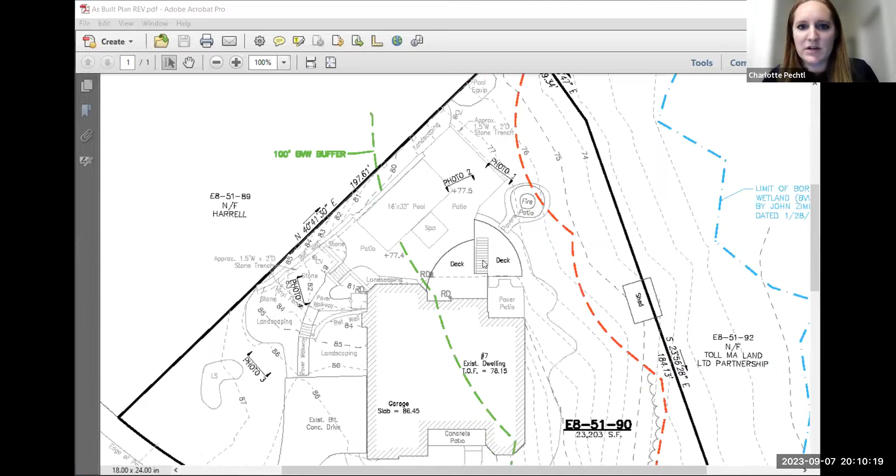The proposed veranda was never built, so Brian just kept the existing conditions here with these decks. And then the mudroom was not built. There was supposed to be a little mudroom from here that just wasn't built in the 100. And then the retaining walls outside the 100 were just a slightly different orientation, but again, it's outside the 100, didn't appear to impact stormwater. So those were the more minor changes.

I will just note that the existing conditions on the proposed plan versus the final conditions on the as-built are just a tad different on, I believe, the easterly property border. So there was a playset area here up in this northeastern corner that was removed and replaced with grass. It was wood chipped, and then a medium-sized tree had fallen down right near where the 74 contour is, and that was from a storm event.

And then in talking with Brian, he mentioned that he spoke with the previous agent, Jeff Summers, about installing a shed along this property border in the 50-foot buffer. It is on blocks, so it's not a permanent structure. It's technically considered a temporary structure, and it's sitting on a gravel base. But Brian, do you have any more information for that? I know you said that you were working with your wife. I'm not sure if you found any emails from Jeff, but you did talk to Jeff Summers about that during the pandemic? Yeah, I believe my wife did. It was by phone and text, so we did not have any emails. It was during the thick of the pandemic. Gotcha. Okay.

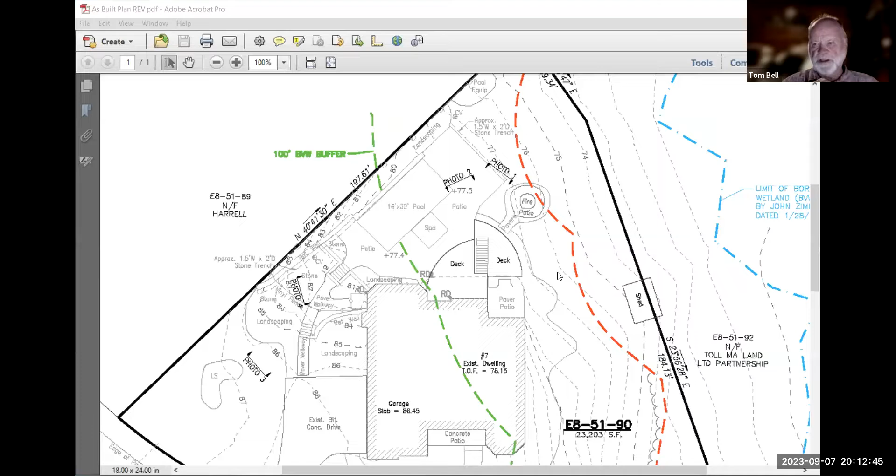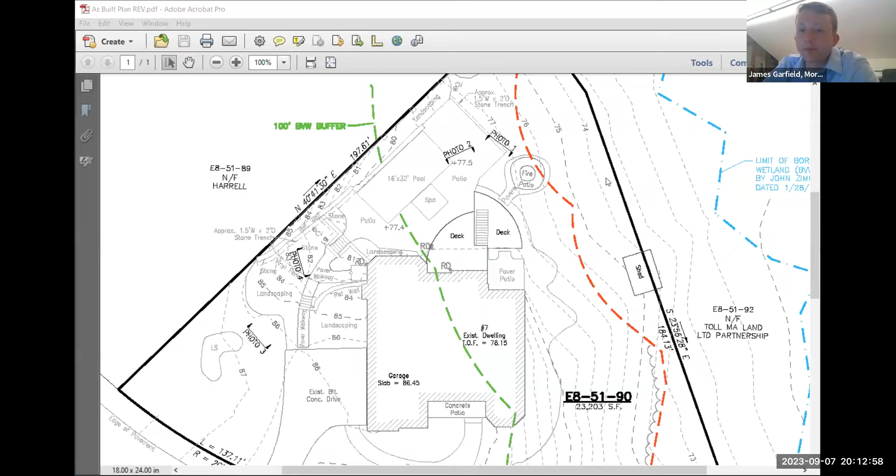Is that shed actually across the property line? James, can you speak to that? That's how it was surveyed on the as-built. Yeah, it appears the backside of it is partially outside of the property, but Charlotte, you said that was a shed that could possibly be moved. We could potentially bring it back onto the property. And does it require a 5-foot setback as well? I'll get to the picture of the shed. I'm not aware of any setbacks for a shed. I'd have to look into that. It can be within 3 feet of the property line, as far as I'm aware, as long as it's under 15 feet in height.

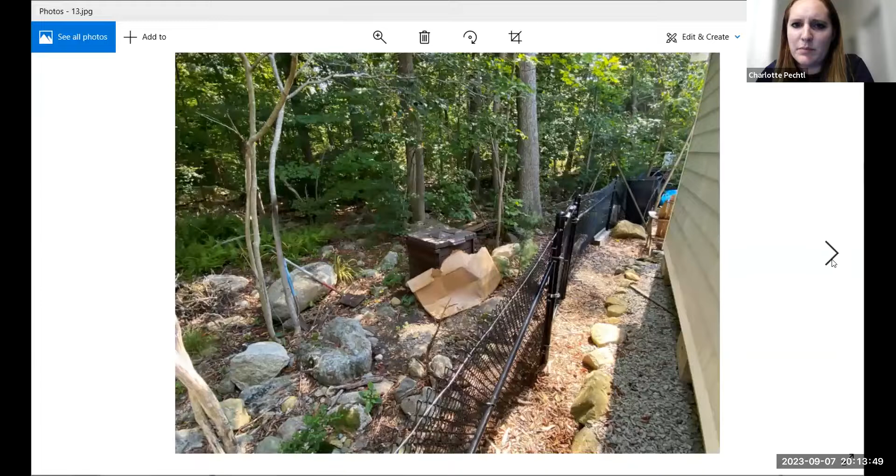So this is where it is, and it's right in front of the existing fence. As you can see from the photo, it's sitting on blocks and it's on a gravel base. So I think that's why the previous agent had noted, since it's a temporary structure, it was more minor. But this area above the shed is sloped, so it's a little difficult to put the shed on the slope. So that I would assume was part of the discussion to put it here.

Yeah. I just wonder whether the abutter is aware of that. It's not our jurisdiction, so let's skip that. No. But I guess, Brian, did you have any other comments for that? I would assume you talked to the previous building inspector as well, if you needed a permit or not. Yeah, and I believe it was because it was considered a temporary structure. We did not. Okay. Yeah. Okay.

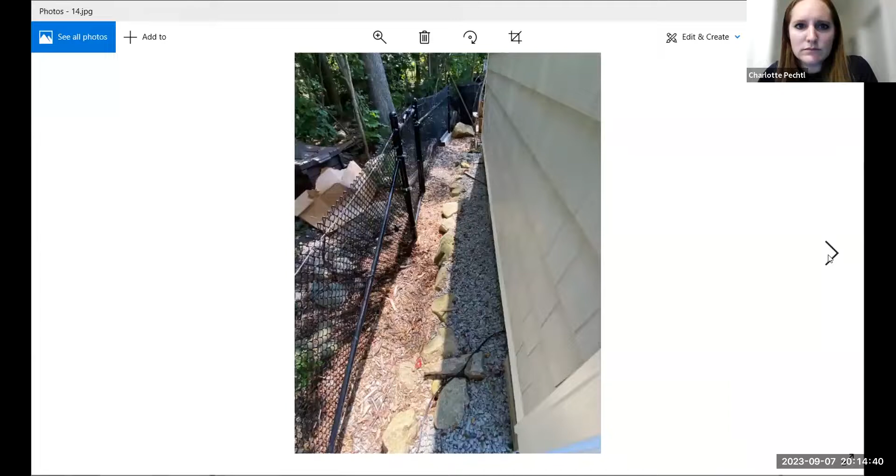Commissioners, any further questions or comments? So I move that we approve the certificate of compliance. Do I have a second? Second. Roll call vote. Kathy Berigan, aye. Chris McIntyre, aye. Chris McFarland, aye. Tom Bell, aye. Motion passes 4-0-0.

And just to clarify, Charlotte, don't ever give anyone permission to put a shed in the 50-foot buffer, all right? Yeah, okay, will do. Thank you. Just to clarify, Tom, was that for the NOI and the stormwater permit? And then the NOI would have our ongoing conditions for 40, 41, and 52? Yeah, let's make that one for the stormwater permit. Can we do that? You mean for the NOI? Oh, well, okay, let's do it for the NOI, and we'll do another one for the stormwater permit. Sure. Just to be sure. Well, we just did one. We just said COC. Okay.

Okay, so I make a motion to approve a certificate of compliance. Oh, to close the, is that right? Close the NOI? Yeah, you would make a motion to close the order of conditions with a certificate of compliance, and then close the stormwater permit with a certificate of completion. Two different terminologies, but still the same acronym. Okay. And with the order COC, you would do 40, 41, and 52 if you wanted ongoing conditions. And the ongoing conditions were no herbicides, pesticides, 3 full growing seasons for plantings, and then the pool best management practices. Right. Do we need to recite all of that?